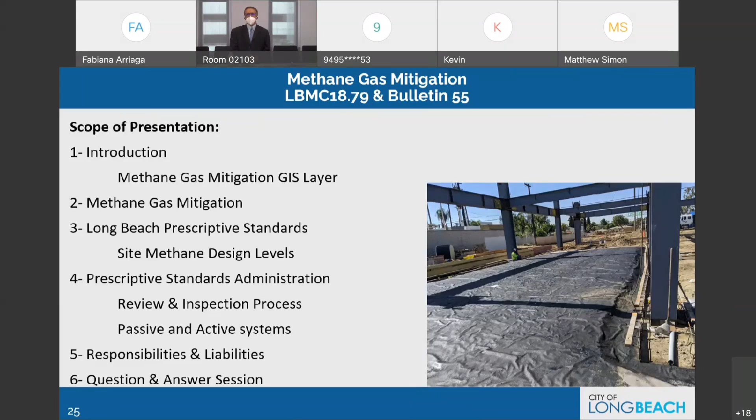But the wild methane gas that's outside, underground, not planned for, could cause a lot of problems, and has caused problems before. We all saw when city of LA streets were on fire, give and take 10 years ago, because of methane eruptions from the lakes. Then we get into, at the end, the responsibilities and liabilities, and the paperwork that we go through. And then we open up to the question and answer section.

History of the methane gas: when we were working on developing the construction within the oil wells, it dawned on us that methane gas needs to be mitigated. It also dawned on us that the city of Long Beach did not have any policies or ordinances, and we relied on other agencies like LA County or City of LA, more progressive cities that had experienced these things before. But it was very timely for us to develop our own methane standards while bringing in the oil well standards, and make sure they collaborate and work with each other in tandem.

There was also economy of scale dealing with consultants to develop these two standards, and economy of scale when it came to staff time developing it rather than independently or separately at different times. When that decision was made by city management, we hired a firm called Geosyntec, a local firm with that kind of experience.

We looked at several cities in Southern California, in Orange County and LA County, with similar programs and ordinances. All that information was pulled into a very large matrix, evaluated, simplified, or in some areas made more restrictive when necessary based on experience. We actually visited a couple of agencies and talked to their officials about how they deal with oil wells and methane.

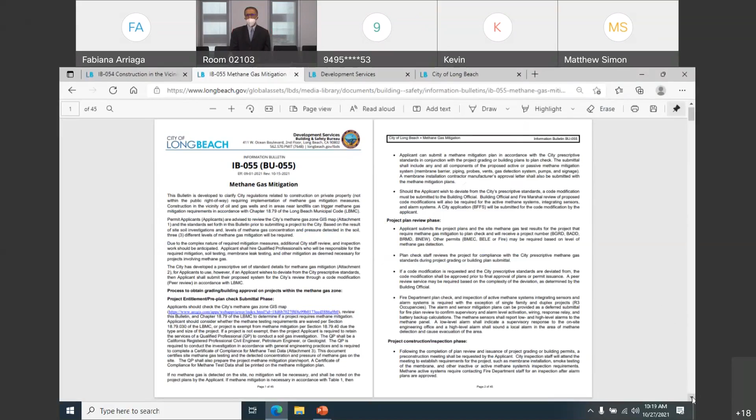Methane mitigation is very technical and covers different stages: post-construction, during construction, pre-construction. But the table you see is key to understanding methane mitigation. This table shows three levels of methane, each based on the water column, the pressure at which methane gas is detected on site, plus the volume in ppmv, parts per million. This is how gas is measured - how fast it's coming out of the ground and what density. Based on those parameters, the three levels were identified.

If you look at the extreme left column, there are roughly 12 mitigation steps involved: gas membrane barrier installation, perforated horizontal pipe installation, vent risers that go up the building to get rid of methane gas, a detection system inside the building and inside these risers and pipes, an alarm system that might be necessary, a control panel, mechanical ventilation - because some fumes can get into the mechanical system, or you need a mechanical system to push it out - pavement venting, and a few other things.

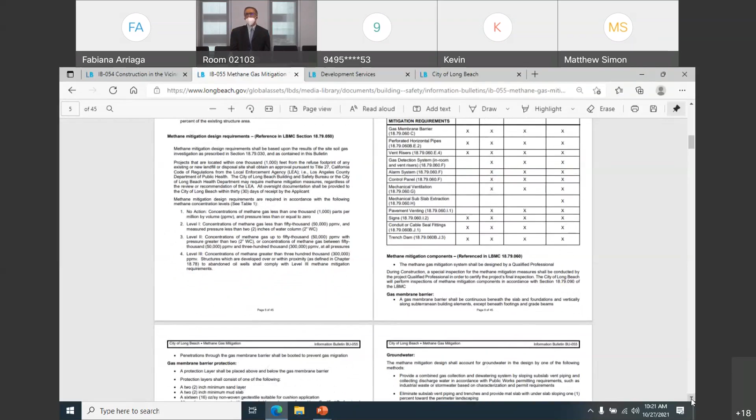We'll get into this table more later, but there are X's in this table that identify what designers or engineers need to use. We call it prescriptive because it's all spelled out here. If a consultant, design team, or architect takes this ordinance or bulletin to heart and learns it, they can put enough notes on their plans to address any methane situation they may run into, based on the methane readings and measurements.

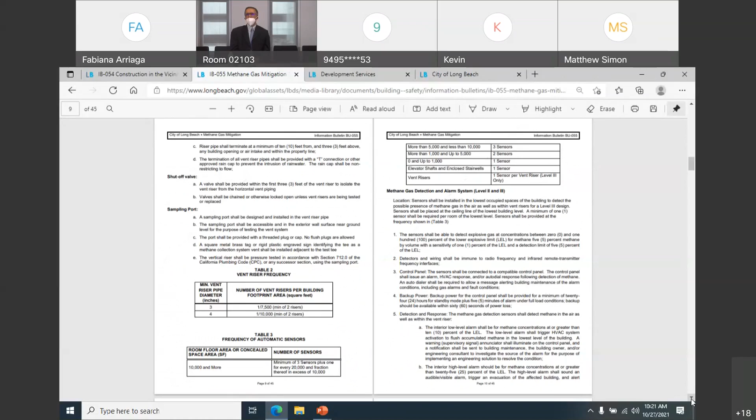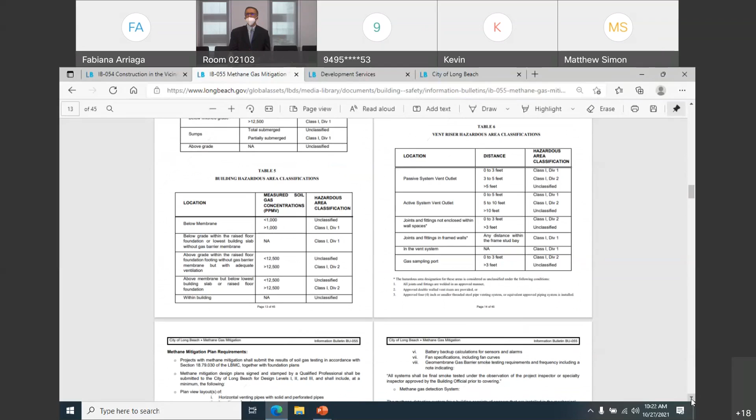This bulletin also gets into how to do testing, what the requirements for testing are, and when the mechanical ventilation requirement comes in - it's pretty expensive. It also gets into the electrical side: Class 1 Division 1, Class 1 Division 1 and 2, for electrical installation in proximity to methane gas. We all know methane gas is combustible and doesn't do very well with arcs, faults, and electricity.

Then we get into the operation manual that needs to be delivered. I'd like to emphasize that later in this presentation I'm going to ask Jenna to go through this methane gas mitigation zone in detail. As you can see, and as she will explain, a good part of Long Beach is now considered in the pink zone, and that's the methane area. It's going to encompass a large area and a large number of projects, with caveats, exclusions, and exemptions that we'll get to in today's presentation discussions.

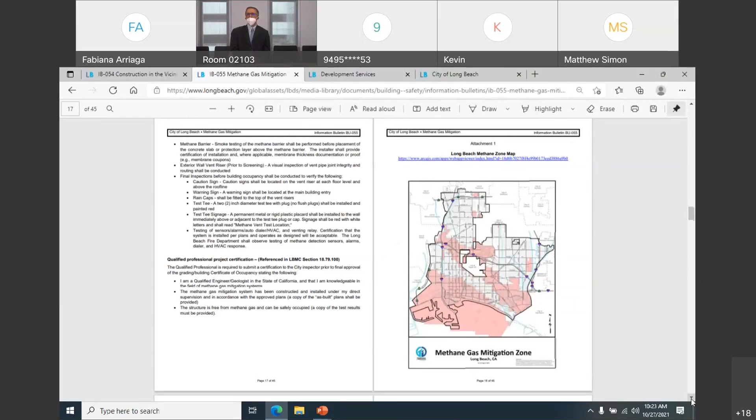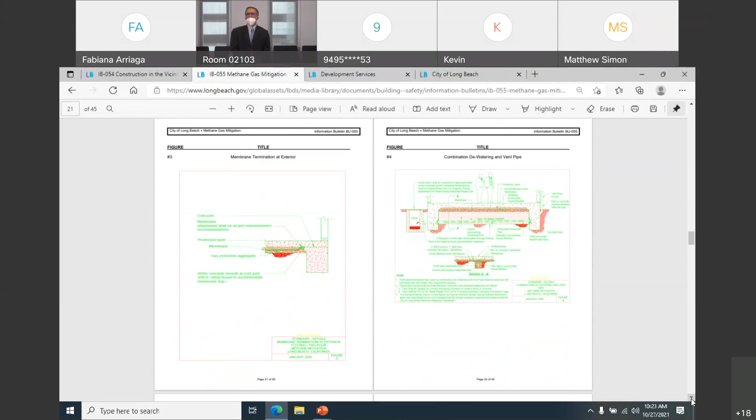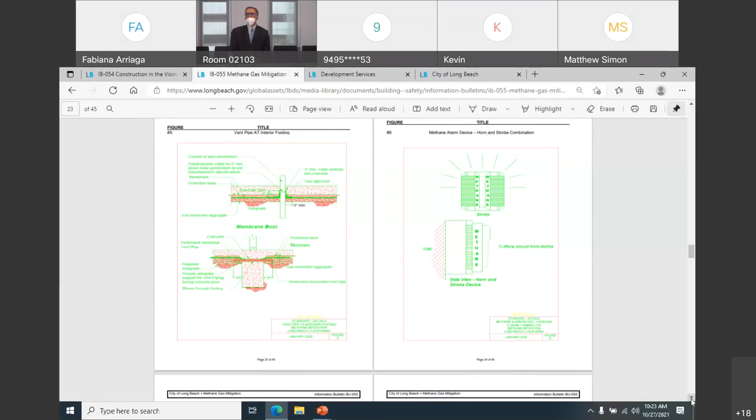One important thing about this prescriptive standard is there are 21 standard details covering how to put a barrier on the ground, how to run the barrier on the building footing, how to start vents, how the vent comes off the ground, how the alarm gets installed, and how the vertical risers need to be sealed up so leaking gas doesn't go through the wrong places.

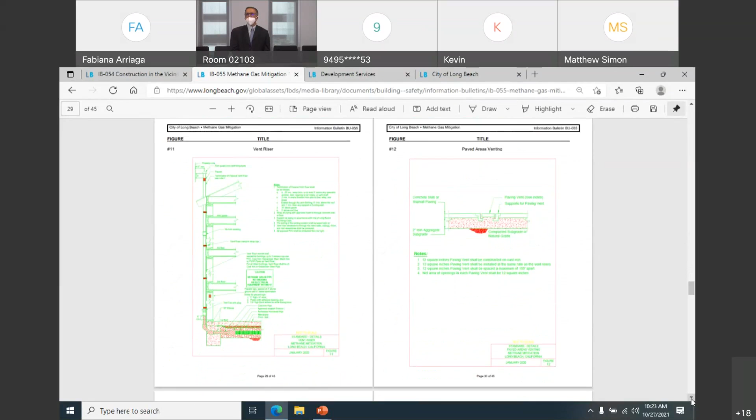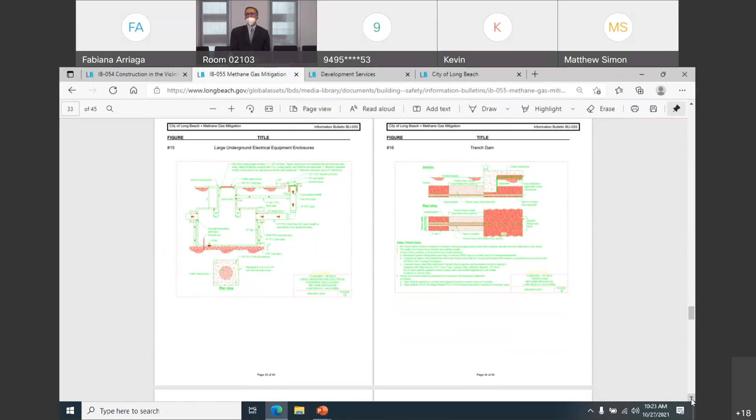Then it comes to electricity, the vertical riser for the methane, the slab venting system, the control panels or any associated signage and electrical requirements, the wall system since gas can trap underground in the wall system, detailing how you poke the buildings, how you poke the footing, and the cap or ventilation system on top for the passive system.

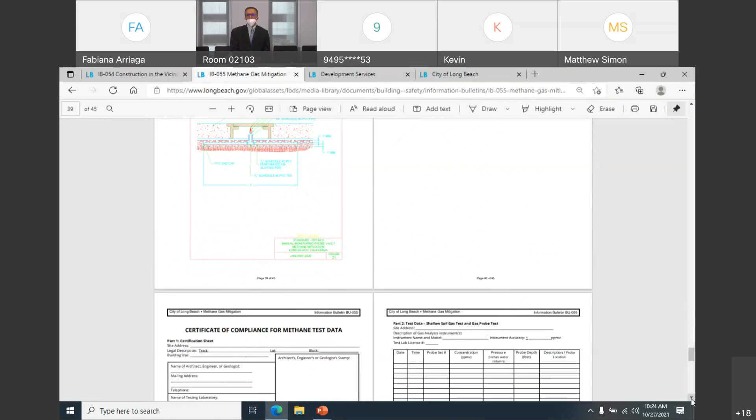All these prescriptive details that could apply to the job have, for the most part, been evaluated by our consultant and manifest themselves in this bulletin. At the end, the certificate of compliance, the associated paperwork, and the document that needs to be recorded are also part of this bulletin. So if you take this bulletin and study it, it will give you A to Z, soup to nuts, on methane mitigation in Long Beach.

Very good. Now we are almost at the last bullet point - large areas in the city were identified as a methane zone. However, there are very large exemptions so we don't jeopardize small projects. The methane mitigation is basically geared towards large buildings and large projects, so anything under 50% of existing structure improvement does not get triggered.

In other words, if you have a shopping center, a hotel, or a residence and you want to make improvements, below 50% improvement this ordinance does not apply and you can proceed. But if you're doing brand new buildings, substantial improvements, or large enlargements, then the methane standards become applicable. Certain projects, like open parking structures that can ventilate themselves so fumes don't get trapped, are also excluded - but all this gets established with site testing.

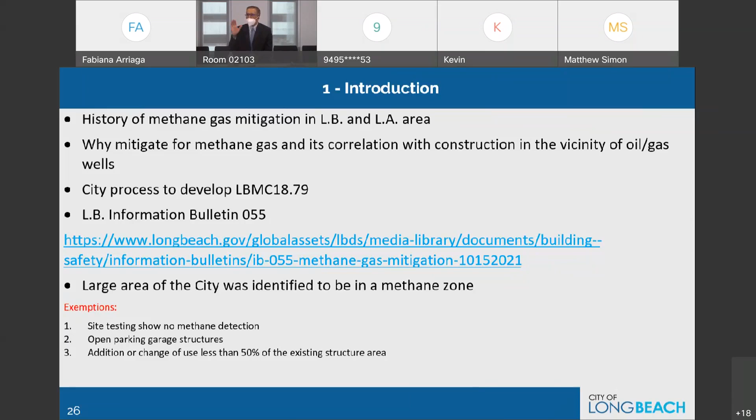So let's say you want to do a 5,000 square foot home, and you do your testing, and the testing shows no methane on your site, even though it's identified in our methane zone - you're excluded, but you need to substantiate that and bring the document forward. Moving to the next slide.

At this juncture, I'd like to leave it to Zeke to share with us some of his field experiences with methane mitigation.

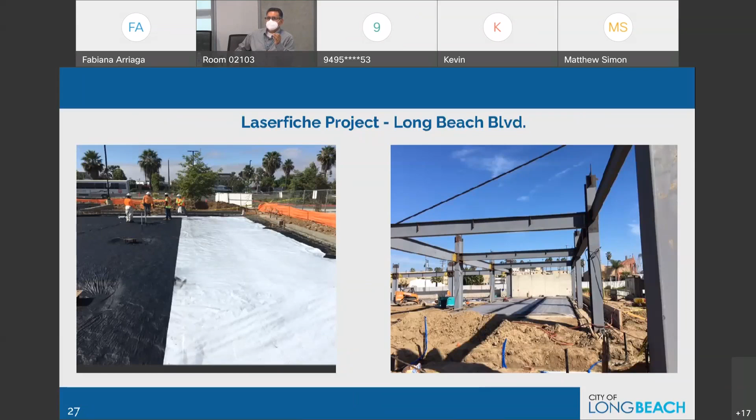Excuse me for stuttering - any joints lengthwise should be sealed, and any joints at the end should be staggered. So there is a procedure of installation, and when the membrane is extended to a footing, it should be attached either to the concrete footing, or if there's a vertical wall, the designer will have to determine how it's going to be terminated. That's basically what these pictures show. We'll be seeing more pictures as we move on in the training.

Okay, so this picture again, it's the Laserfiche project. During the methane mitigation system installation, there were a few inspection hurdles, not problems, we had to go through due to the design and progress of the building. Some of the inspections were not conducted during installation of the methane mitigation components.

Unfortunately, if any components are not inspected or observed by the city representative, the contractor or owner of the project has a responsibility to make those areas accessible for inspection, and that's what happened at the Laserfiche. Just a few areas had to be uncovered to inspect components above ground level, the vertical risers, which must be inspected for signage identifying the type of venting the pipes are for. The signage had to be inspected, also the anchorage to the building in vertical or horizontal position, and termination outside of the building.

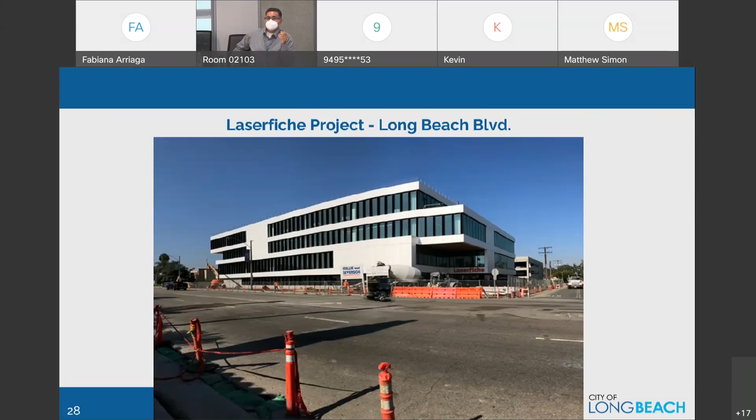At the back of the building, there's another open garage parking structure that did not require the methane mitigation system per city ordinance. However, the owner decided to install it anyway, for some reason, and we are pleased with that. So both of those structures are sitting on a methane mitigation barrier.

From here, David, I'd like to move to the next slide. Thank you, take it from here.

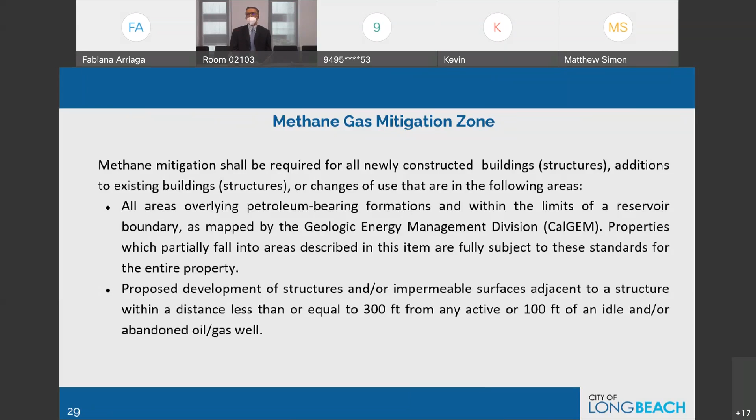Methane zone mitigation, which Jenna will go through shortly in detail and show you the actual maps, came about based on identifying several areas highlighted here. The city considered all areas overlying petroleum-bearing formations and within the limits of the reservoir boundaries that existed on CalGEM maps. That information was brought in. We also looked at proposed development of structures within 300 feet of any active well and within 100 feet of any idle wells. That information was brought in.

Next slide. We also looked at proximity to the landfills, the couple of landfills in Long Beach. Anything within 1,000 feet of landfills, because landfills also create or produce methane. So those zones were all depicted on the GIS system and were mapped. We also looked at coastal zone projects and properties that will be in the coastal zone. They still have to go through the coastal zone requirements and review, and those are not excluded.

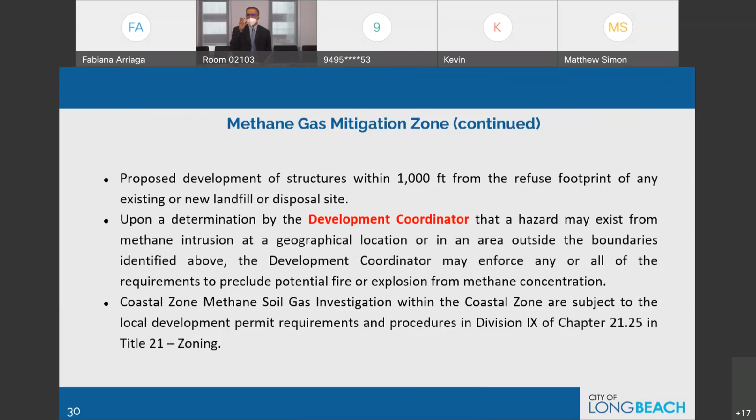When the whole map came about, the development coordinator, which happens to be my office, also has the ability to select another area that we may find in the future that produces methane. With all these rigorous areas that we zoned and came up with as a methane zone, we cannot deny that there may be another area that becomes effective 5 years or 10 years down the line, for different reasons. So that is also something we are thinking about.

And with all that in mind, when we go to the next slide, I'd like Jenna to take it from here and show us your hard work. Thank you, David.

All right, so if you could go back to the PowerPoint, please. I'll be going over the web application where you can search for a location to see if it's within the methane gas mitigation zone or outside of it.

As you can see, this is the link to the web application. You can also find the same link within the bulletin. For those of you who were here in the first session, this is the same link to the application that I just went over. For those of you who missed the first session, I'll also show you how you can access the web application through the city's website.

So could you please go to the city website? Thank you. The city website is www.longbeach.gov. When you're on the home page, on the right side, there are different tabs. Third from the bottom, you want to click on Planning and Building. What it'll do is direct you to the Development Services page. At the top right, there's the Maps section. Hover over Maps, and you'll find the Methane Gas Zone GIS Map.

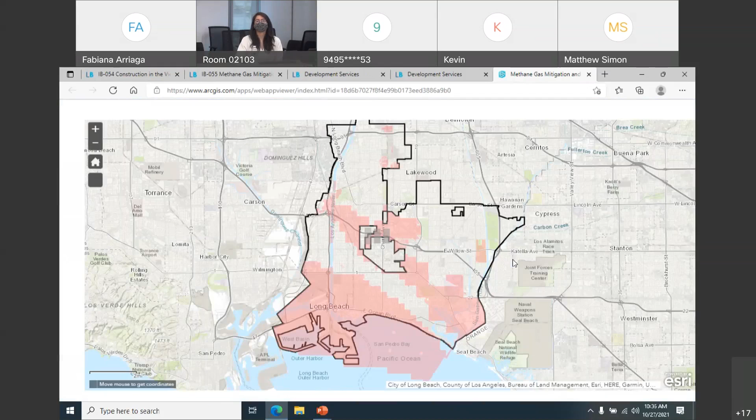Once you click on it, it'll open up a new tab and direct you to the web application. The first thing you're going to see is the disclaimer, regarding the data used within the application and also the terms and conditions. You'll need to read the disclaimer, click on 'I agree to the above terms and conditions,' and press OK. Once you do that, you have access to the app.

The majority of the screen is the interactive map. On the left panels, there are different widgets which will help you understand what these layers of symbology mean, and also search functionality where you can search for a location you're interested in. Top left is the Methane Gas Mitigation and Oil Well app title. Top right is the link where, once you click on it, it'll open a new tab and direct you to the Schedule Building Inspection page.

Going back to the application, I'm going to help you understand how to navigate around the interactive map. Top left, this is the plus sign where once you click on it, you zoom in the map. Opposite to that is the minus sign, you zoom out. If you want to pan around, just click and drag around the map.

You can actually do the same thing with your mouse scroll as well. Hover over the location that you want to zoom in and scroll in to zoom in, scroll out to zoom out. If you want to go to the default extent of when the application opened, click on this home button, the default extent, and it'll go right back to the whole city boundary.

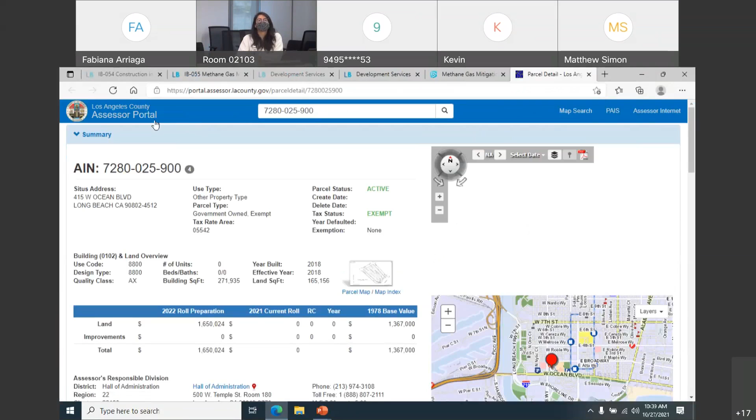What it will do is zoom in right to the address, and it will also select the parcel that it intersects with the address. On the left side, you'll also see additional information regarding the parcel, and you can see the same information if you click on it as well. This URL, more info, once you click on it, will open up a new tab. It will direct you to the LA County Assessor's portal page so you can see additional information regarding the parcel.

I'm going to exit out of here, and going back to clear selection, all you have to do is click on the X to clear search.

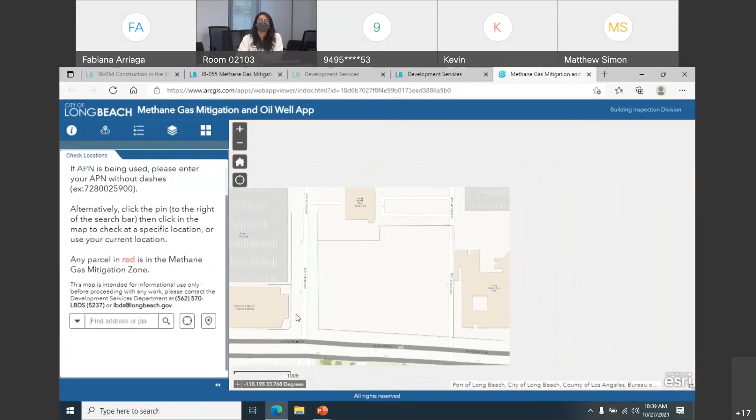This button is very similar to the My Location button I just talked about. It will zoom you right to your location on the map. You can also click on this set location, click on a point on the map, and it'll show you the address and also the parcel that gets selected and the additional information.

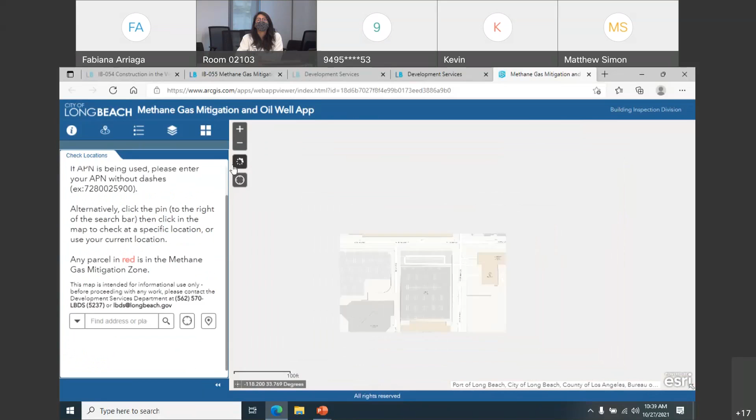Other than address, you can actually search by APN as well. So if you know the parcel's APN, go ahead and type it into the search. If it's in the Long Beach database, it'll also show up within the dropdown, so you can just click on it. It will zoom you right to the parcel and select the feature just like the address.

And lastly, you can also search by coordinates. So let's see if my keyboard works. Oh, it does. So let me type in the XY coordinate and click search. Same thing as the past two, it'll zoom right to the latitude and longitude that you just typed in and select the parcel.

If the parcel that you're searching for has this red, pinkish overlay, that means it's within the methane gas mitigation zone. So as you can see, the red area, the pink area right here, is the methane gas mitigation zone. Outside of it is outside the zone.

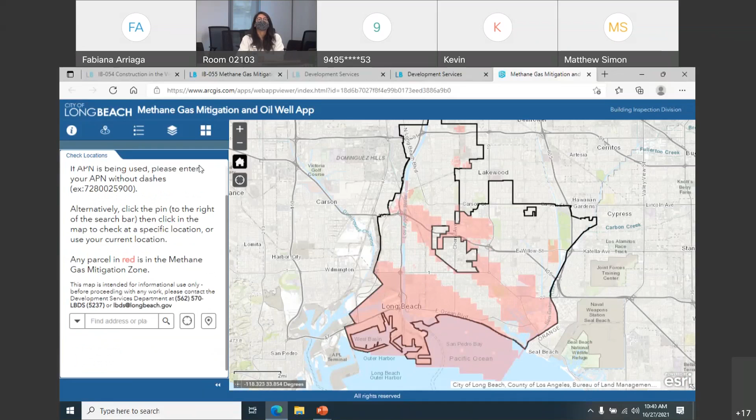Now I'm going to start talking about the widgets from left to right. Let me go ahead and click that. This is the About widget, and it tells you the description of all these icons. At the very bottom, this is a disclaimer, the same disclaimer that you saw when you opened the web app.

Second widget is the check locations that we just went over. This is the legend to help you understand what these symbols mean. So again, this pinkish layer is the methane gas mitigation zone. The black outline is the city boundary. I'm going to zoom in so the other layers will be turned on.

The green dot you see here, this is the active wells, and you can see the 300-foot buffer around it. If I navigate over here, the gray point is the inactive wells with the 100-foot buffer. These active and inactive wells are data from CalGEM.

And this is the black square, the SWIS site, so Solid Waste Information System site, from CalRecycle, and there's a 1,000-foot buffer around it as well. The methane gas mitigation zone layer will be updated twice a year around January and July based on new data that we receive from CalGEM and CalRecycle.

As you zoom in, you'll also see the gray line. This is the parcel, so the parcel will be updated on a monthly basis. The city does receive updated parcel information from LA County.

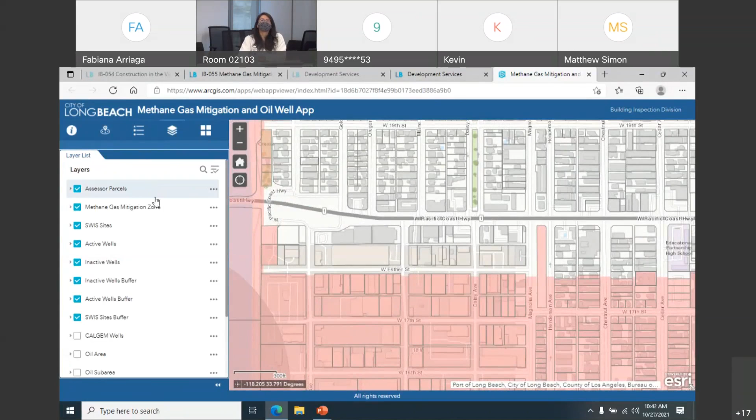The fourth widget is the layer list. You can actually turn on and off the layers. By default, there are certain layers that are already turned on, and we also have additional layers for your reference. So let me go ahead and turn off the default layers.

And I'm going to zoom in a little bit more. The CalGEM wells—these are well data directly being pulled from CalGEM, which has the same legend, the same symbology, the same description. You can additionally click on the well to see additional data offered from CalGEM.

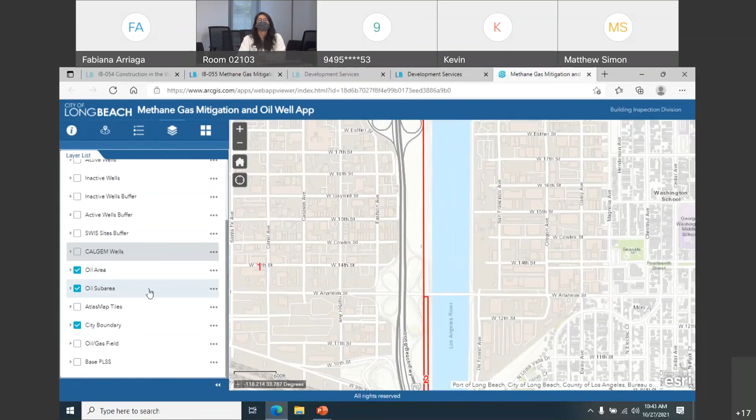And we also have oil area, oil sub area. This is a layer used internally for the city staff, but we also have it available for your reference if you'd like to use it.

And additionally, we have the Atlas map tiles as well too that the city used.

At the very bottom, you'll see the oil gas field. Again, this data is from CalGEM. You'll see the oil gas field boundary around the city of Long Beach. If you click on the layer, you'll be able to see the name of the oil gas field.

And lastly, we have the base PLSS. If I click on it, you'll see the township range, and you'll also see the section as well if you want to use it as a reference.

So for the layer list, you have control over what layers you want to make visible on the map and which layers you want to turn off. And I'm going to zoom into a little area again.

Lastly, we have the base map gallery where you can actually change the background of the map. You can change it to the dark gray canvas, or to imagery. And if you like the default background that we have, just scroll all the way to the bottom and click on the web map right here on the topographic—and you're back at the default.

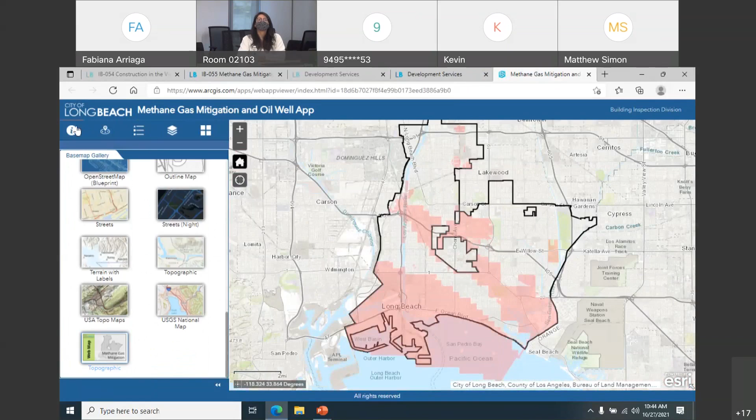So that was a quick overview going over the functionality of the well application. We're going to go back to the PowerPoint and transition back to David, who will be talking more about the next slide.

Thank you, Jenna. The utilization of the methane gas mitigation map and GIS system was an innovative way for us to deal with the information. And I want to mention one more thing: the fact that we combined the two ordinances' timing and brought the oil well and methane ordinances and bulletins together also assisted us in determining why the GIS layers have to be combined in one layer.

We noticed this GIS layer is, we call it, methane gas mitigation and also oil well, because it contains both sets of information. It's a very, very valid document to use, especially for architects, developers, and prospective property owners to investigate and get the information they need related to both topics.

Now, moving to the next slide, we're going to get on the technical side of our presentation, but intentionally we're going to utilize very simple language to explain all these things you need.

But if I'm a designer or an engineer looking at the site and I want to see what the city is providing me as part of the prescriptive method that I can put to the job and save a lot of money, this is what I do—this is what I need to understand.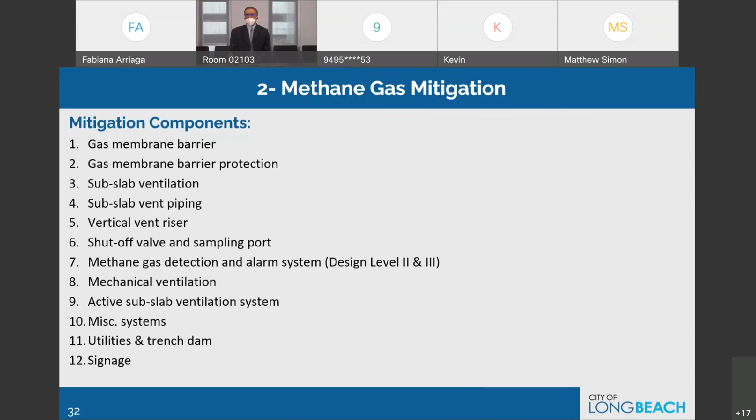Then the process gets a little bit more involved because then you have mechanical ventilation, and mechanical plan checkers and engineers get involved with active versus passive systems. And then we get into some more specific utility and trench dam details, and the signage is quite important.

This table that we have here was copied from the bulletin and also from the ordinance. I explained the top row and the extreme left row. But let's go and get into the X's and see what it takes.

If we detect level 1 pressures on the site based on the low probe testing and deep probe testing, all we need is a membrane barrier and the pipes and some signage and some trench dam details.

But as we move to level 2, it's tricky because we are talking about pressures and different volumes of methane gas. You will see more X's appearing in those columns, and those X's start talking about gas detection, alarm systems, control panels, low voltage systems. As soon as we get into the alarm system, we are talking about backup generators and backup power in the buildings, because if the city power is out, these alarm systems and generators that are supposed to come on won't work. So more cost, more consideration as we move to level 2.

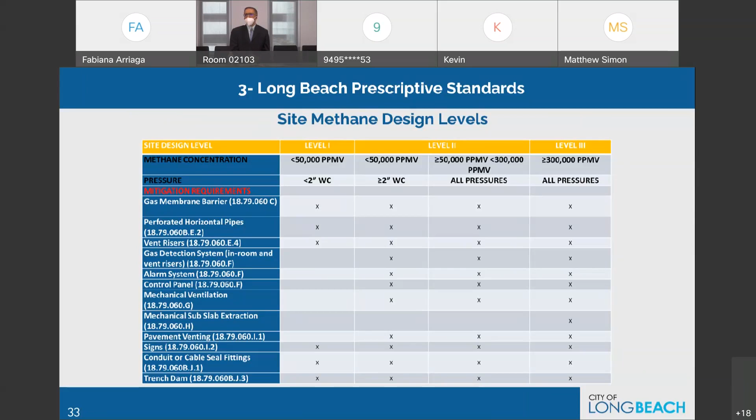We will get more into details of these, but if you need to read about these items one by one, the sections of the ordinance and the bulletin are spelled out in front of each item. As you become familiar with our online bulletin and ordinance, you can read on all of these topics directly based on the sections indicated on this presentation, on this table. Next slide, please.

Now, the equivalency standard administration, or this system that we have, I should call it the prescriptive standard, goes to the plan check with the city plan check and inspection staff, who will inspect it. The city development coordinator or building official—by now you know my office's role and what I do—considers the prescriptive application, or when we consider code modifications or deviations from the standard we are proposing.

The role of a qualified professional engineer is the same. An expert hired by the developer needs to evaluate all this and propose the methane mitigation. However, for methane mitigation, the credentials are different. Here, the individual can be a California registered professional civil engineer, a petroleum engineer, or a geologist hired by the developer, versus with oil wells, which was restricted to petroleum engineers.

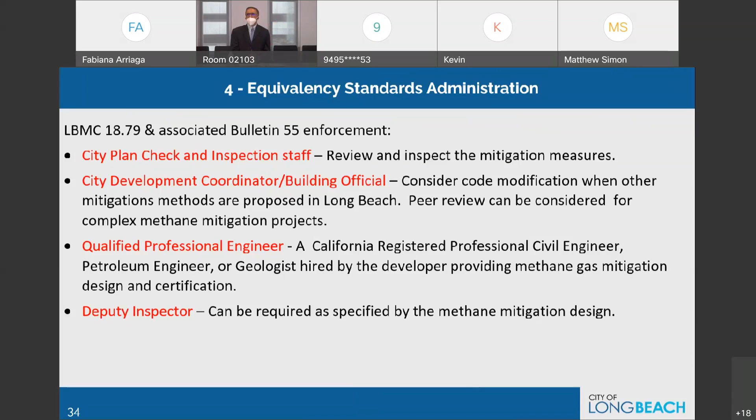There may be a need for a deputy inspector to stay on the job if the qualified professional engineer cannot stay on the job, so they can continuously inspect the methane mitigation design elements and components. Going to the next slide. At this junction, I'd like to also pass it to Zeke to share with us his valuable experience in the field with these projects.

Once the mitigating system is approved and inspections are conducted, based on Chapter 17 of the California Building Code, this type of system falls in the category of special systems that require special inspections and tests. So at the site, I asked who is the qualified professional

representative that will be observing the installation of all mitigation components as prescribed and required by Chapter 18.79. I'll be checking and contacting and talking to either the deputy methane inspector or the qualified professional, if he or she will be on site for the inspection of all components.

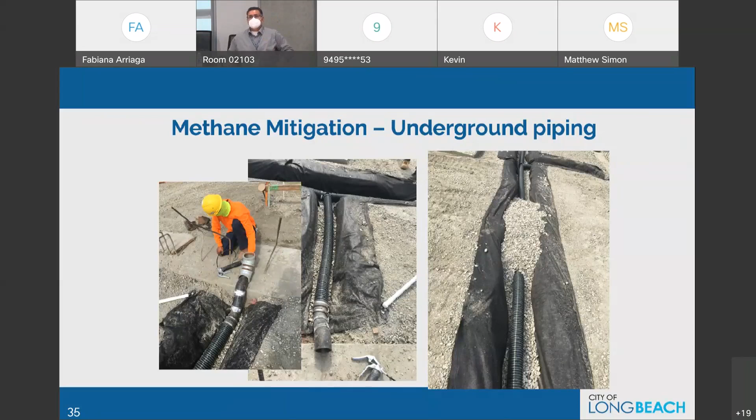Okay, now I'd like to move from here to the next slide, please. Okay, now this slide is showing a few items or components of the methane mitigation system.

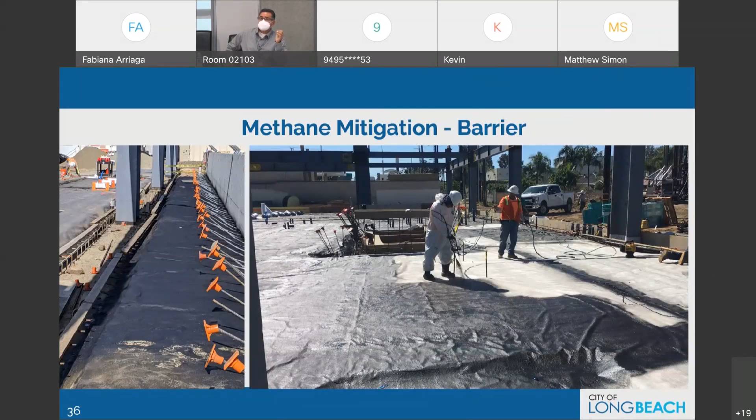Now, there are different types of asphalt membranes. Liquid boot may be applied on horizontal surfaces and vertical surfaces. There's another asphalt compound identified as Liquid Boot LT, just one example. Liquid Boot LT is for low temperatures, so it must be applied when the temperature is no lower than 25 degrees.

There's also asphalt or Liquid Boot 500. If no one is paying attention or not reading the labels, Liquid Boot 500 is only approved for horizontal application, not vertical. So that's basically what I go through during the application of the asphalt on the membrane.

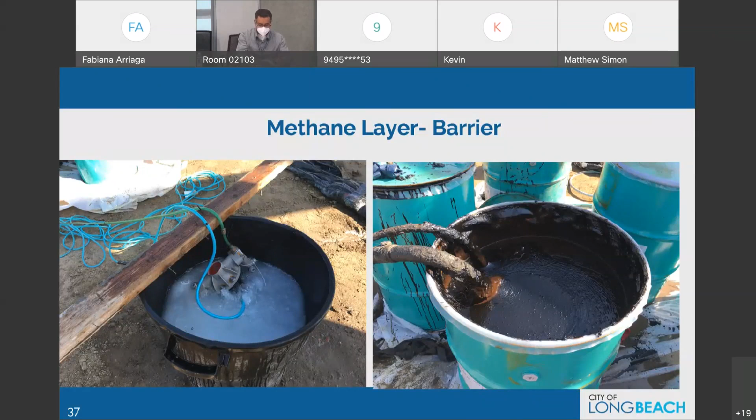And after the membrane is cured, a request for a smoke test shall be requested to the city. I'd like to move to the next slide.

During the inspection or observation of the smoke test, the inspector will also verify that, or ask if the deputy inspector is on site, since the city inspector or representative is just there to observe the performance of this test. Who is responsible for approving the installation and the smoke test inspection falls under the authority of the qualified professional. So the qualified professional, if present, will make the observation; if not, the deputy inspector.

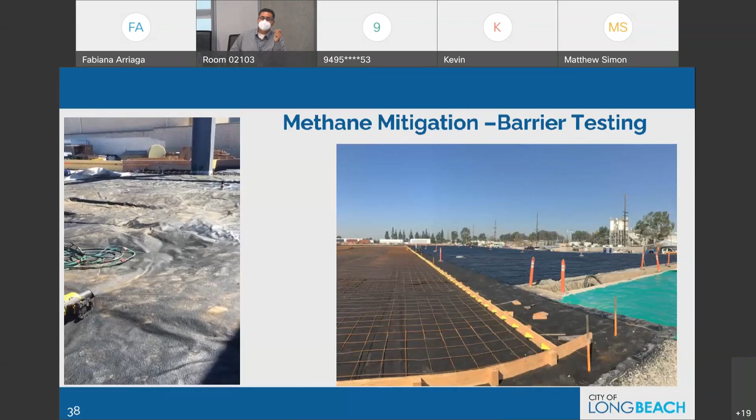We're going to play a small video just to show how this blower is inserting air under the membrane. Once air is pumped under the membrane, it will rise up, and if there are any leaks, it will show the smoke coming out of it.

And at that point, the asphalt applicator, or liquid boot applicator, or membrane applicator will go and patch it. And if it's done within the same day, the inspection is okay to pass. We don't have to wait for the following day to cure, as per the manufacturer authorization.

Now, after the smoke test is performed, the contractor is allowed to install the rebar, but prior to the installation of the rebar, if there's any rebar, the membrane must be protected. That's why the picture on the right shows 3 different layers. Again, the design will dictate what kind of protection layer the designer prefers for this system.

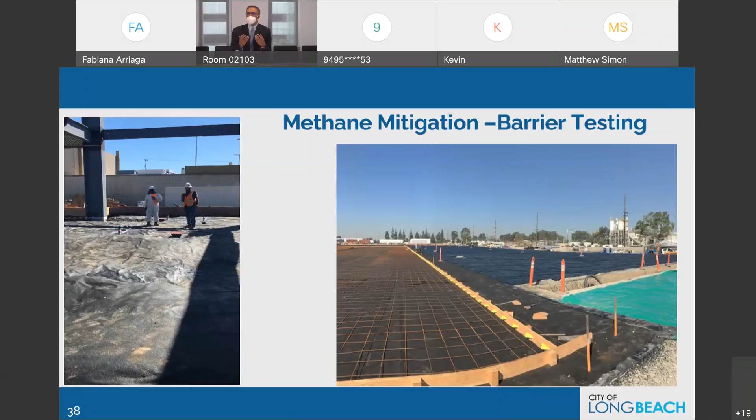Going back to the previous slide, I wanted to mention one more thing before we move on. Methane mitigation plans can be submitted to the City of Long Beach in conjunction with the grading plan. To make life simple, right before or in conjunction with precise grading, the methane membranes can go in. Rather than a separate submittal to the city, developers and architect engineers can combine it and submit at the same time, because our grading plan check engineers will check all these details.

Moving to the next slide, in conjunction with methane, as we said, methane is an explosive and combustible gas. So anytime you work underground or above ground in the vicinity of methane, the type of electrical work completely changes. Because we're introducing this methane zone, every electrical junction box, every conduit, every electrical system has to be per Article 500 of the California Electrical Code. That article is about a 100-page document that provides details for electrical engineers to design their electrical system in proximity to explosive, hazardous conditions and chemicals. In our case, that would be methane gas and potentially other gases emitted underground.

The picture on the right shows a detail for a junction box that needs to be installed on top of the methane barrier without poking it or making any holes. After Zeke comes through and inspects the barrier, and after it's pressure tested and smoke tested and the barrier is good, then the electrical trades have to start, and they have to be familiar with the process. If they're not familiar, they could puncture the methane barrier that somebody spent many hours establishing.

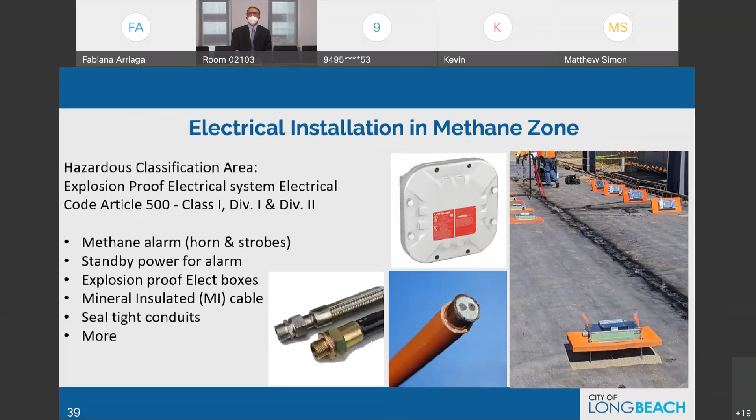Here are some examples of the seal tight and explosion-proof electrical boxes and connections. Maybe next slide.

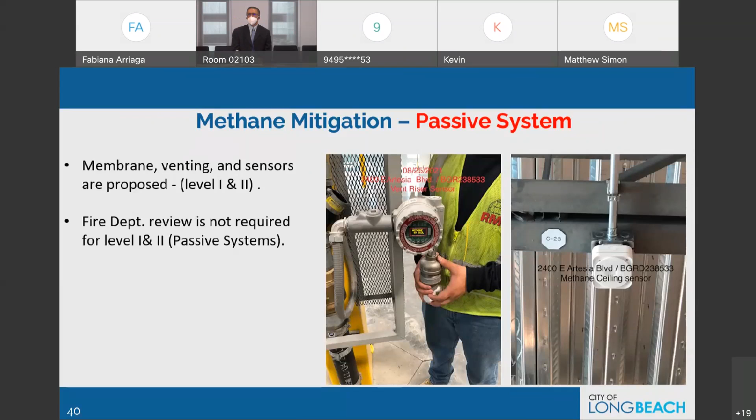If we go to the next picture, this is an active and passive system. The active system has motors on top and sometimes on the lower level of the building to help exhaust the gases that could be trapped in the pipes. The picture in the middle is a passive system that relies on the ambient temperature and ambient air to get rid of the gases. You may find both of them in one building.

I'd like Zeke for you to go through your experience with these systems in a recent project that we went through.

Yes, David, thank you. This installation shows two components. It is the same building, and those two pictures are taken from the same area, but showing two different types of systems. The venting system, which is the middle picture on the left, it's a passive system. Now the venting system on the right, it's an active system.

And how do we know it's an active system without going into the plans? Well, there is an enclosure right next to the termination of the vent. That is for a motor. So this is a motorized system that will exhaust any gases into the atmosphere.

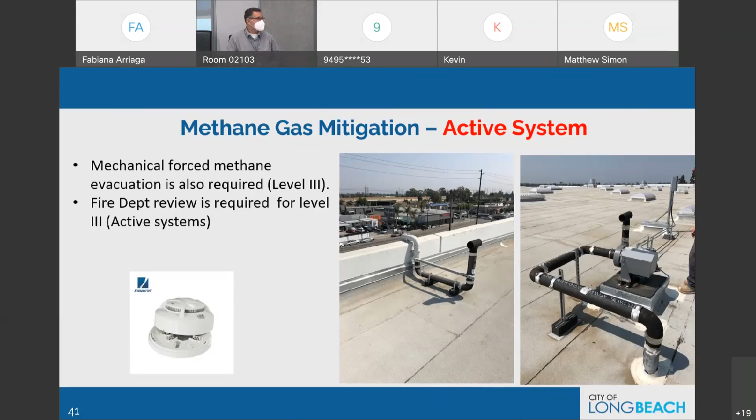Yeah, this is also a picture of some sensors and active system with the signage necessary on the vertical risers. There's a lot of detailing involved; we don't want to get into heavy duty details, but it's the work of professionals to put these systems together to make sure these buildings are safe, especially if it's an active system. And this picture is a good indicator of the level of expertise required just on the sensors alone in the vertical risers.

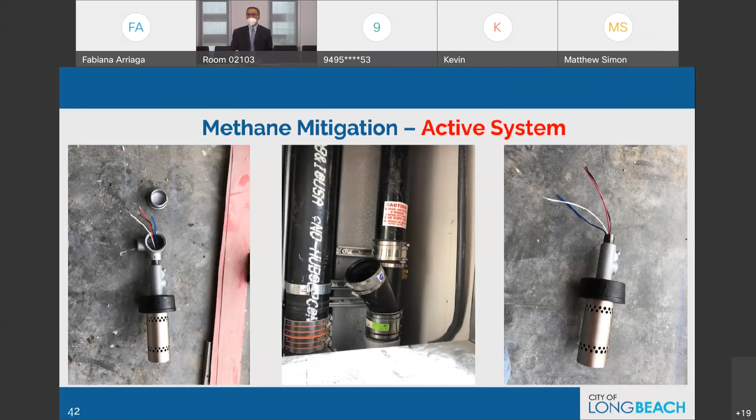Moving to the next slide, we want to wrap this presentation up. This was a successful project that was a refinery, now converted to the big post office warehouse, I would say.

But a sign of the city cleaning up, and people don't see it as a large petrochemical or chemical country.

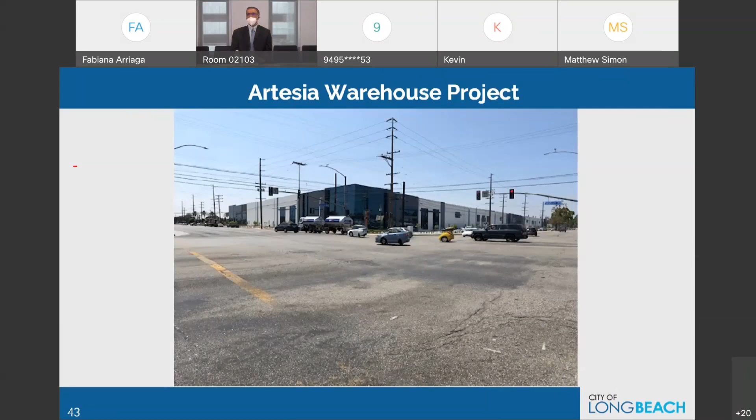In conclusion, building and safety is mostly in charge of construction in the vicinity of oil wells and methane mitigation, in order to make life easier to practice in Long Beach. These pioneering ordinances were designed to make Long Beach more business friendly and a safer environment for the city, for people to live in the city.

When it comes to methane gas, owners and developers have to start by hiring a professional engineer or professional testing company to measure the amount of methane existing on the site, evaluate the site mitigation plan based on the prescriptive system the city is offering or any other system they want to offer. They should put that on the plans, bring it in conjunction with the grading plans for permit approval and plan check.

After the permit is issued and the project is ready to go to construction, as Zeke said, there will be a pre-construction meeting and inspection of the membrane installer. The membrane installer has to be certified by the membrane manufacturer. It's the skill set Zeke showed, just spraying and developing that barrier.